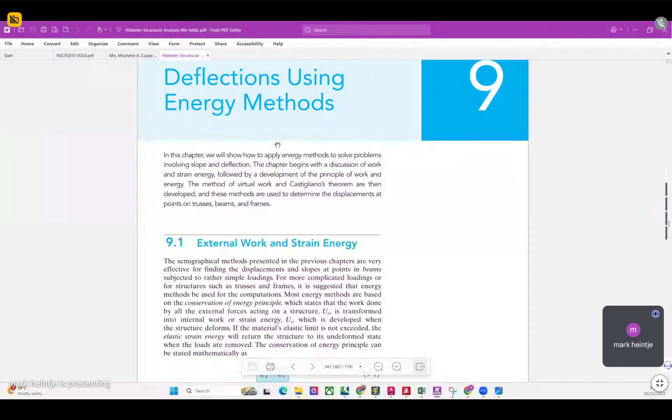Okay, but again, we are going to focus more on trusses because, if you still remember, the classical methods of solving deflection that we discussed last, the double integration method, the area moment method, and the conjugate beam method, cannot be used in solving for the deflection of trusses. So that is why this is now particularly deflection for trusses. Okay?

So I am going to go directly to the methods or the formula that we are going to use in the solution for deflection using energy methods. The basic principle for this is the first law of thermodynamics, which tells us that energy cannot be destroyed, but it can be transformed into another type of energy. So if our structure is subjected to external forces, those forces cannot be destroyed, but rather will be transformed into another type of energy.

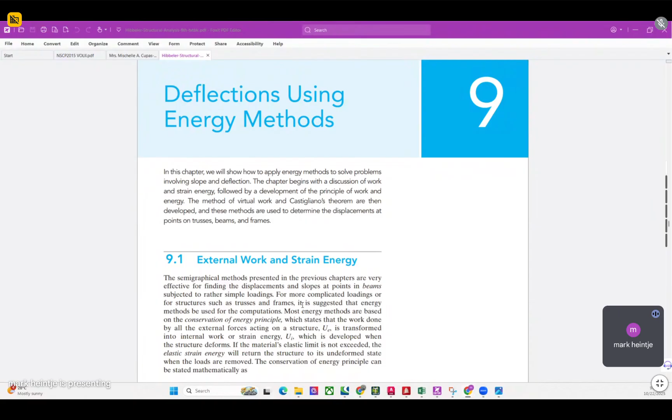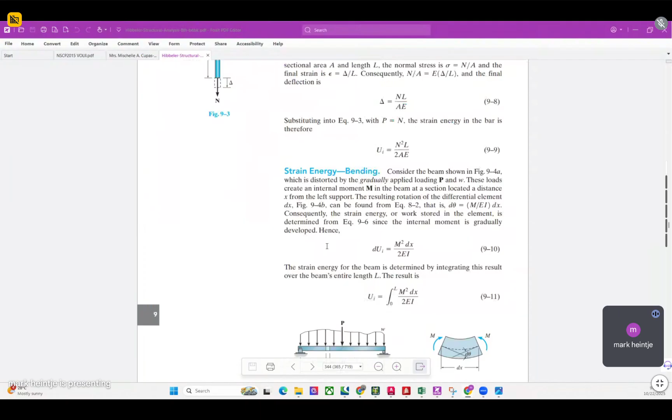So when the system is subjected to external forces, it will experience stress, and that stress will be released in the form of strain. So the equivalent of the external force will be the strain energy. That is the conversion of our external force into another type of energy. In this particular method there are two approaches: the virtual work method and Castigliano's theorem method. So allow me to start with the principle of virtual work.

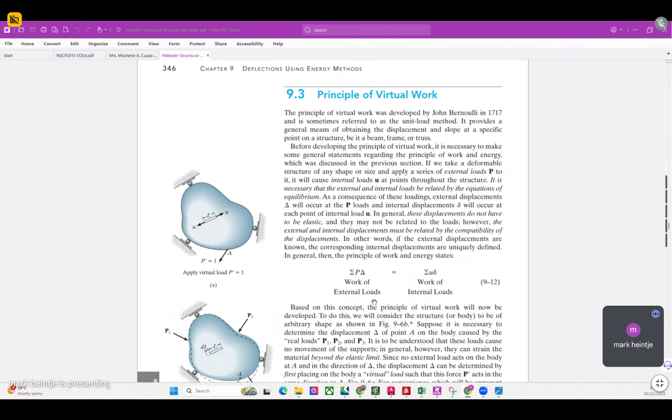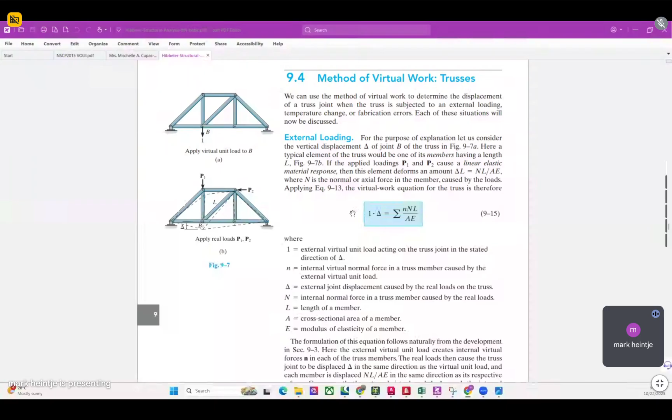The principle of virtual work is almost the same as the conjugate beam method, wherein we are going to have a representation of our structure subjected to real loads, and subject it to virtual work loads, so that we will be able to determine the deflection of a particular truss. This is the general formula for virtual work methods: 1 times delta, where delta is the deflection, is equal to the summation of nNL over AE.

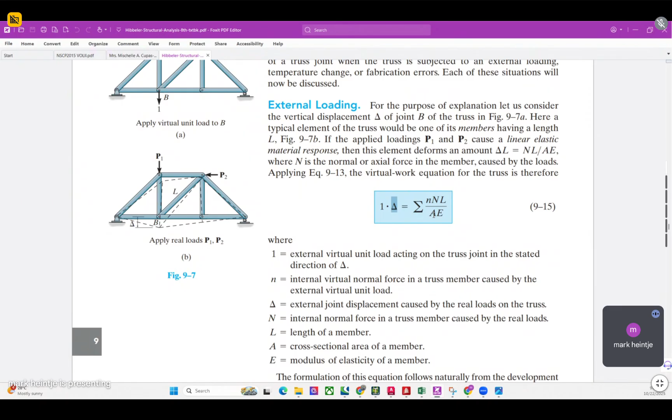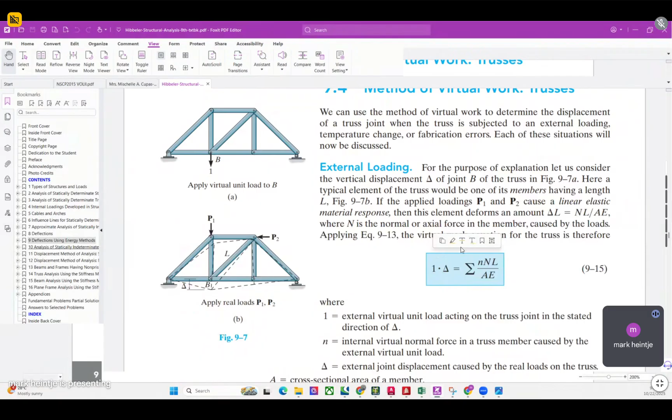Small n is the force of a truss member subjected to our virtual load. Capital N is the member forces of our truss subjected to the real load. L is the length of each member of our truss. A is the cross-sectional area of each member of the truss, and E is the Young's modulus of elasticity of each member of the truss.

Now, in this figure we have two loadings. This is the truss subjected to the virtual load, and this is the truss subjected to the real load. The first figure is what we use to solve for small n, while the truss subjected to the real load is what we use to solve for the member forces relating to capital N. So these two are member forces considering the two conditions.

Take note, it will be much better in the virtual work method if we use the method of joints, because small n and capital N are forces of all the members of our truss. So with the joint method, I think that would be better because it would be easy for us to solve for the member forces of our truss.

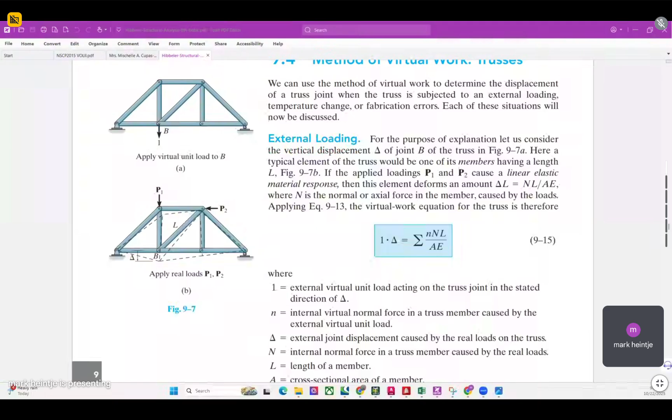Okay. So let's go to the sample problem. But before that, let's have a break. I need to answer the test assigned by the seminar I attended. So about 5 minutes, I'll answer the corporate test.

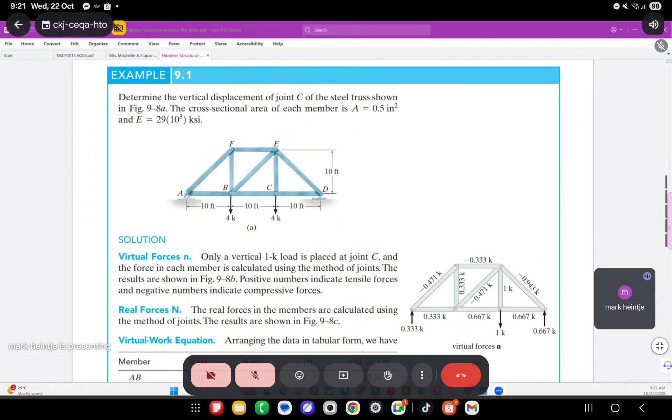Okay, so again, the complicated part is when we are going to solve for the member forces of the truss, because there are two scenarios: the truss with the virtual load, and the truss subjected to the original loading.

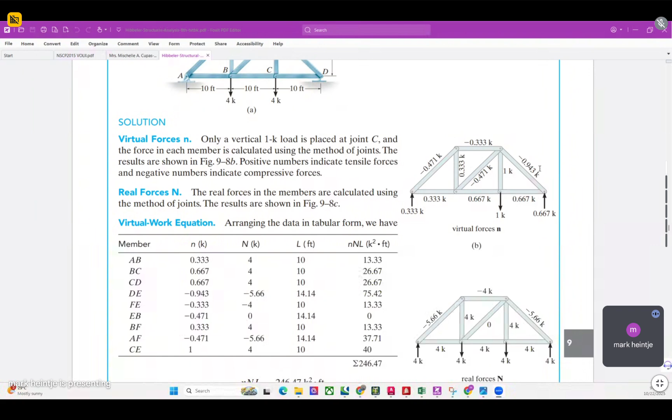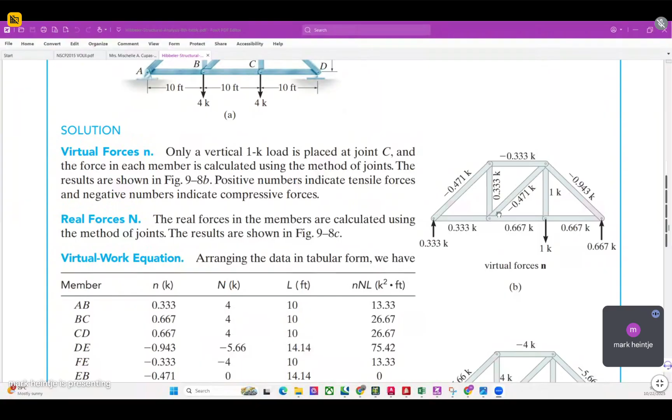So you will notice in the solution here it is tabulated. And again, in solving the member forces of the truss, you can use this kind of method, without showing the free body diagram of each of the joint. I will consider that one. So you will notice here we have a table, because it is easier if we tabulate it, it summarizes our parameters or values in order for us to solve for the deflection.

So you will notice here the members of our truss are listed, from AB, BC up to CE, with its corresponding member forces. So if we are going to solve for the small n, this is the member forces considering the truss subjected to our virtual 1 unit load. So if you notice here, what we are looking for in this truss is the vertical displacement at joint C.

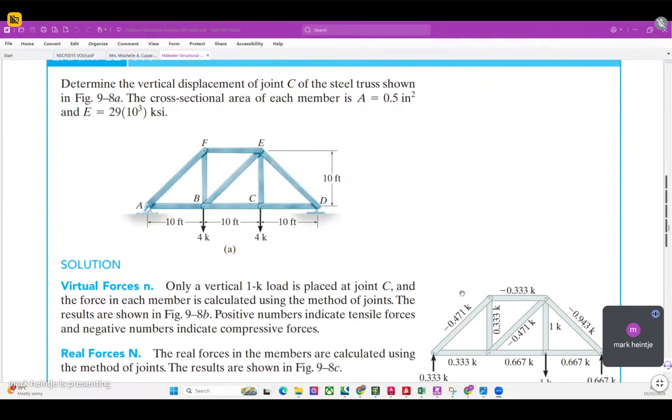Now, considering that our cross-sectional area is 0.5 inches squared and the Young's modulus of elasticity is 29,000 ksi. So you will notice the virtual load used here is at point C. It is subjected at point C. Okay? So that is the unknown displacement that we are going to solve.

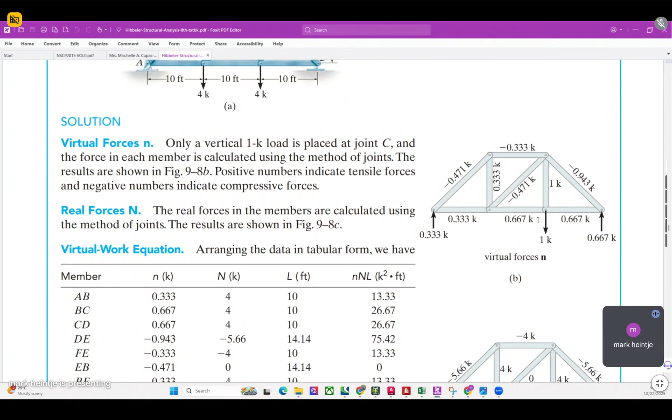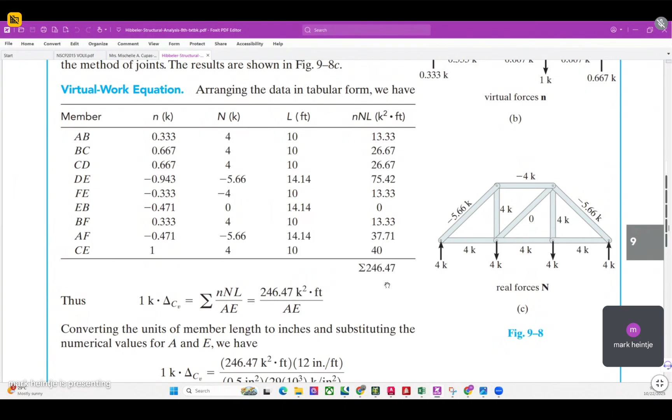Okay? Ayan. From that alone, these values, these member forces, then for the real load, we also have these member forces. Okay? We can have our N and L. This is the product of this value, we sum it up and substitute it, and divide it with our area, the cross-sectional area, and the elastic or Young's modulus. So with that, we have a vertical displacement at point C of 0.204 inches.

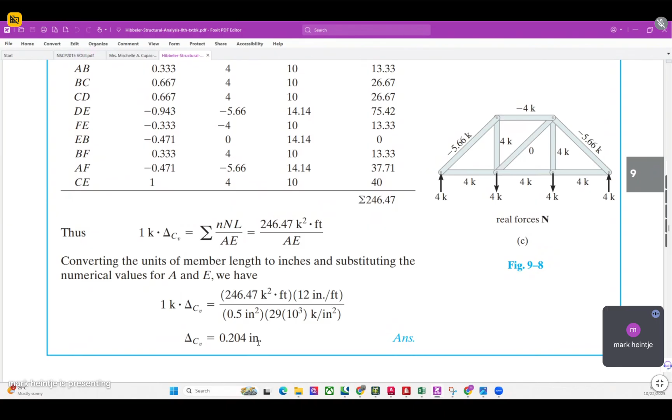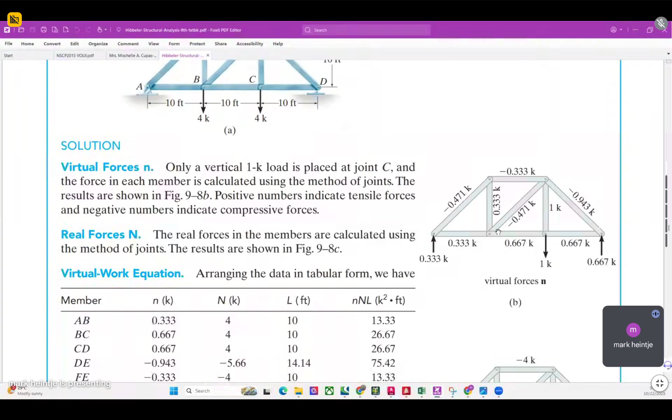Okay? So simple na siya, no? Ang medyo dugay lang is ang pag-solve sa atong mga member forces. Kay kaduha mo mag-analyze, no? One is for the virtual load and one is for the original load. Okay? So yan.

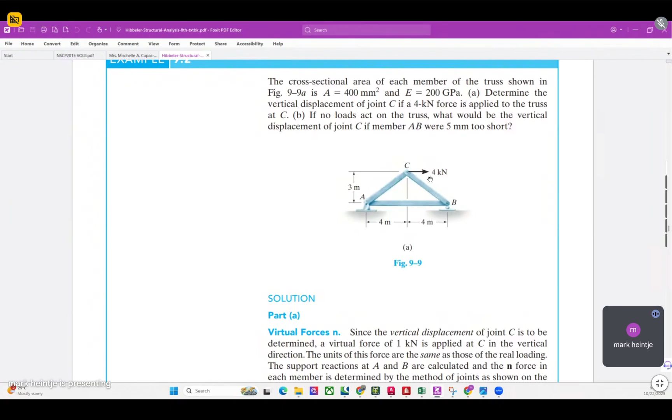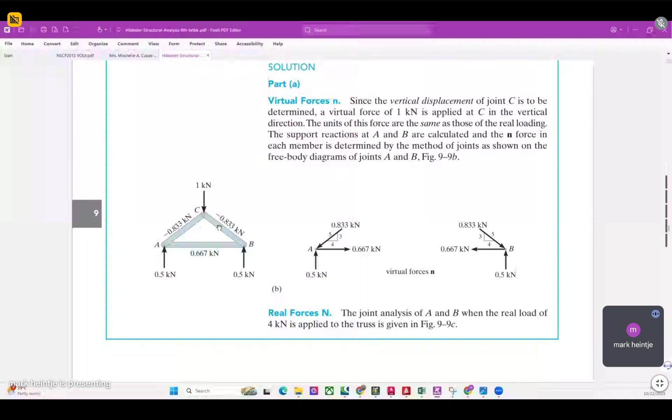So in the next problem, same gihapon, no? You will notice ang requirement nato is ang displacement at joint C. So that is why ang atong virtual load is subjected to joint C also. Okay? And then we solve the member forces. And the member force using the original load. So we can now determine the product nL. So sum it up and divide it with our cross-sectional area and the Young's modulus of elasticity.

Okay? I hope that before you solve our plate, you will be able to solve some problems dito sa atong problem exercises at the end of this chapter. At least naa tay mga answer dito sa back page sa atong textbook. Ma-compare ninyo kung sakto ba ang answer before you solve the plates.

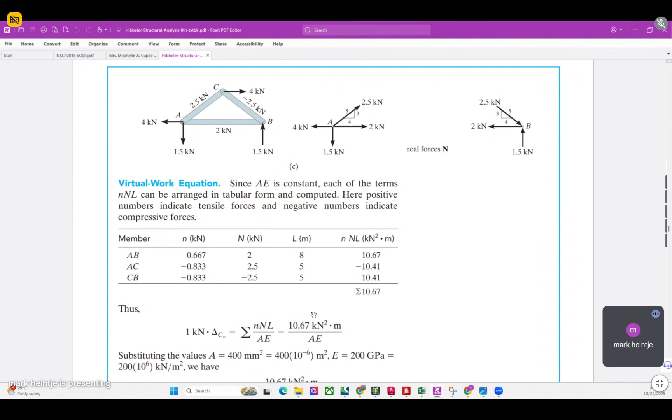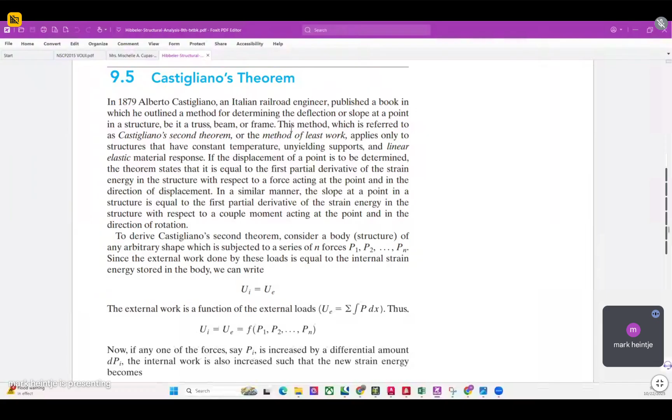Okay? Ang next nato nga method is the Castigliano's theorem. So the Castigliano's theorem actually is almost the same as the virtual work method. Pero ang difference lang, if you notice here, mao ni ang atong formula nNL, this is the same pa rin. The ∂N/∂P, this is the same as the small n nga atong gigamit kanina, with the truss subjected to a 1 unit load.

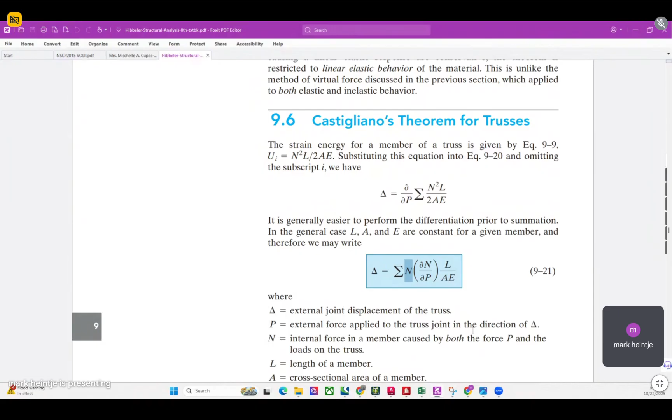Okay? Pero ang N nga gamiton nato diri is with plus P, wherein P is the external force applied to the truss joint in the direction of the displacement. So meaning kung asa nga joint gihapon ang atong... okay. So again, with an additional load P. So I think it would be much better kung larga ta diri sa atong sample problem.

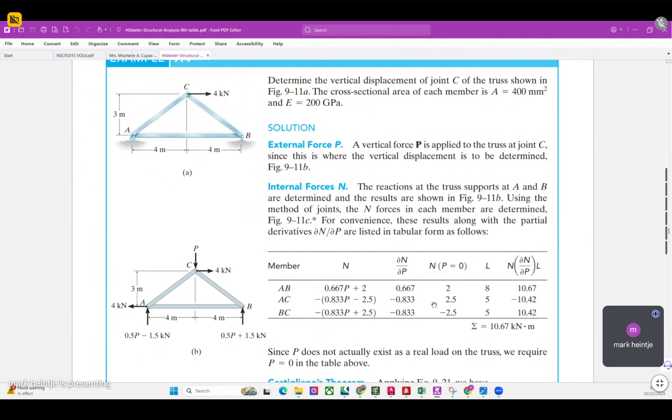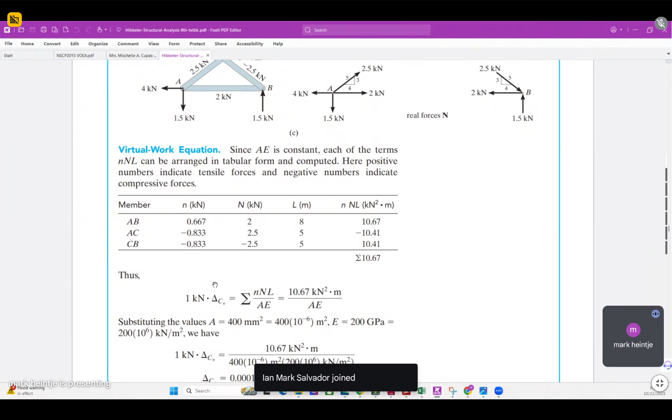Okay, so determine the vertical displacement at joint C. So you will notice here, kung atong i-compare dito sa atong previous solution. Ayan, small n, the same na siya diri. So we don't have problem with this because this is actually the same as what we did in the solution for our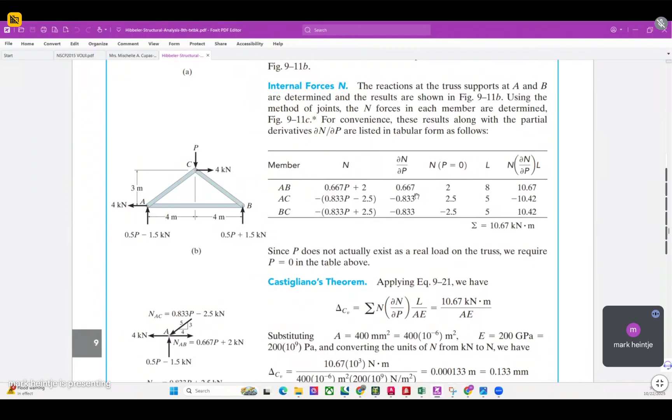virtual work method. But if you notice, ang N nga gamiton in this case, we can solve this N here using these particular values, wherein in this case, naa tay gi-add nga vertical load nga P. So same procedure, we are going to solve for the member forces of the truss with an additional load P depending on the unknown joint wherein we solve the displacement, and direction will also be dependent on the unknown displacement. In this case, vertical lang ang displacement at point C, so that would be going down, which is P. So naa tay mga member forces here.

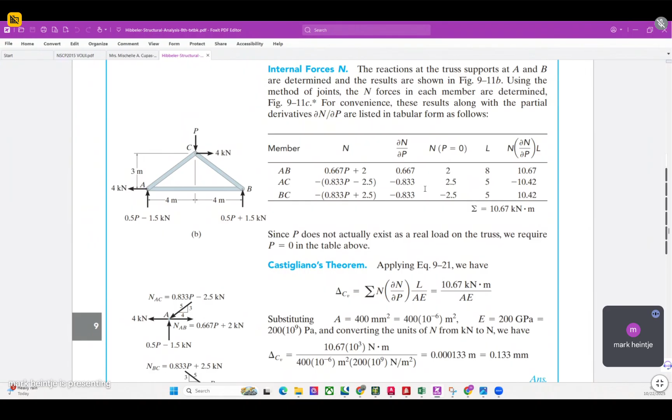So pag-solve nato sa N, we are just going to equate P as equal to 0. So that is why this part, 2, 2.5 and negative 2.5, since P is simply equal to 0. Right? Okay? So same ra pod ang answer nga atong makuha ganina, ang atong value sa atong Castigliano's theorem.

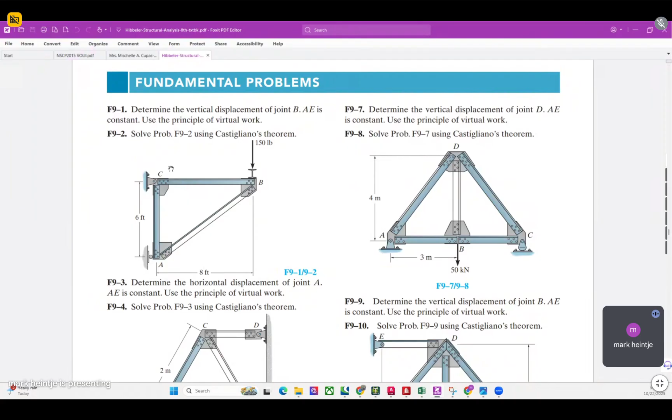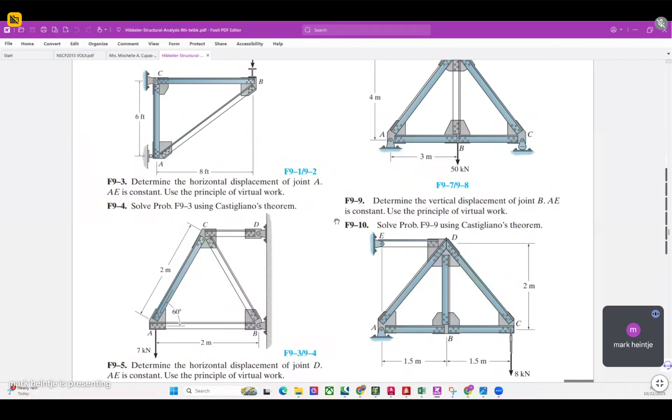Anyway, the method is very simple. You are just going to solve for the member forces depending on the loading that we are going to apply, either the virtual or the original load, and multiply it with our length to solve for the summation of our nNL.